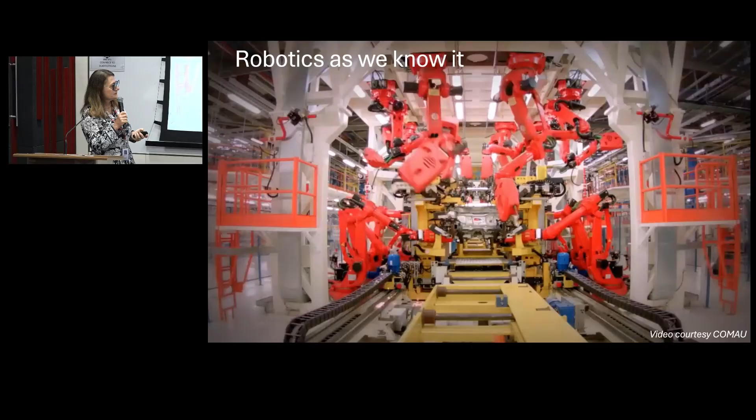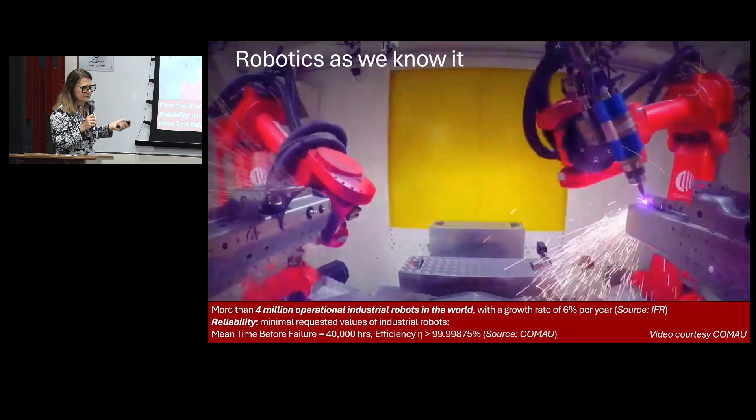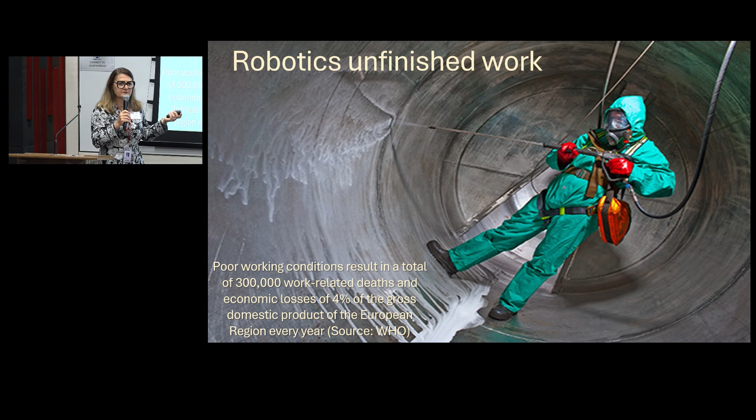This is robotics as we know it, and it's a fantastic kind of technology, so reliable, so effective. There are jobs that cannot be done without robots. Robots can really build most of the objects of our daily life today. But there are still jobs that are done by people and cannot be done by robots yet. And sometimes those jobs are not so good for people because they're dangerous or just because they are not meaningful.

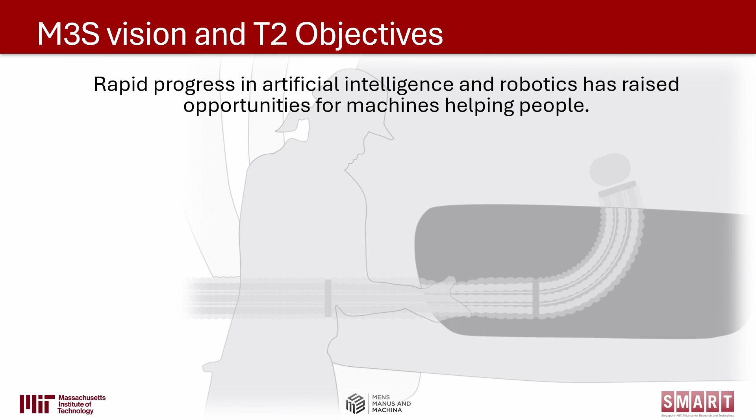So you know that M3S starts from the consideration that we now have a very rapid progress of robotics technologies, of AI, and we can take advantage of that to help people at work. So more specifically, you have heard already that M3S has these two big research questions on how we can take advantage of that and how we should change the way we work and the policies and the institutions.

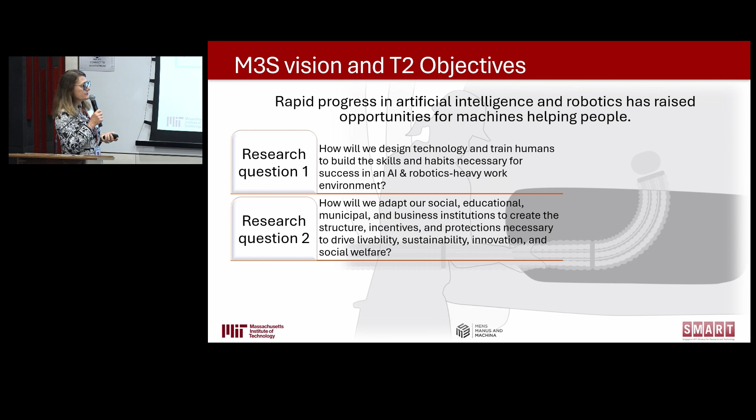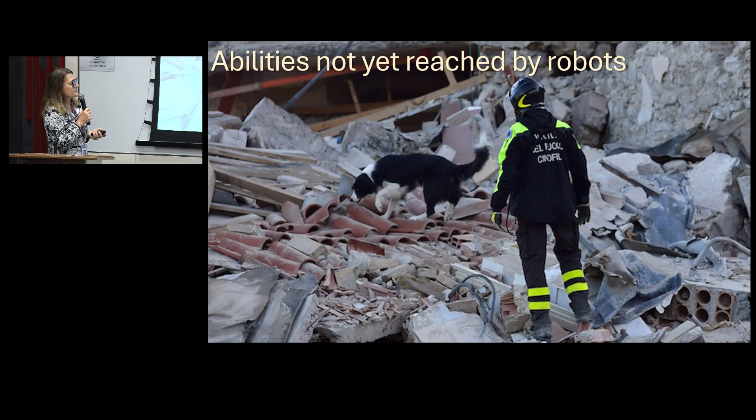More specifically, in M3S, T2 investigates how robots can assist human workers and investigates forms of human-robot interaction at work with cognitive and physical tasks. So the reason why there are jobs still done by human beings is that there are abilities that are not yet reached by robots. So in scenarios like this one, are current existing available robots suited for the tasks? Maybe not yet.

What are the gaps? What we observe in living beings are complex systems operating in very complex environments, which is a bit different from what happens in robotics, because in robotics we think that a complex system is more difficult to control and more likely not to work. So we try to simplify as much as possible. And in the same way, we try to simplify the environment. The factory environments we saw at the beginning, where robots work so well, are sort of simplified and adapted to the robots. But instead, in nature, we see the opposite.

Very complex systems. Those living beings are way more complex than any robot in terms of sensors and muscles to control. And the environments are also complex, real-world environments, but their behavior is so smooth, so effective. So this is exactly what we should do in robotics. We should build robots as complex as needed for the tasks they are supposed to do, and they should be able to operate in real-world environments.

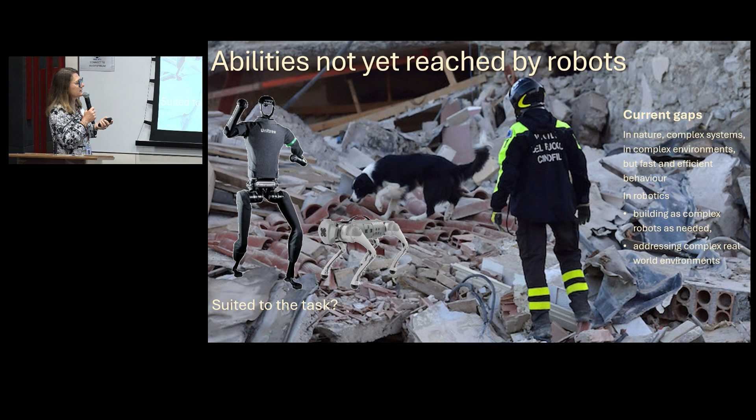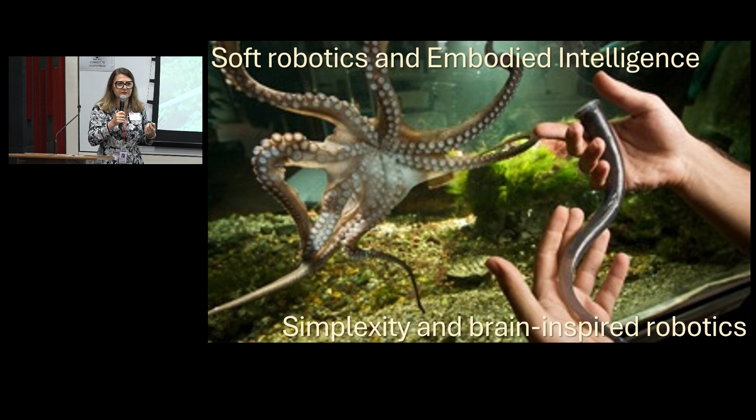We can take lessons from nature. We can try to find the tricks that nature put in place to simplify the control, not the system, not the environment, but the way it works. And this is the direction we are taking in T2. So we are working at two levels. One is the level, let's say, of the body. We are exploring soft robotics technologies for building our robots, because they give us the possibility to implement embodied intelligence, so to distribute intelligence in the body itself and simplify control to some extent, and also take inspiration from

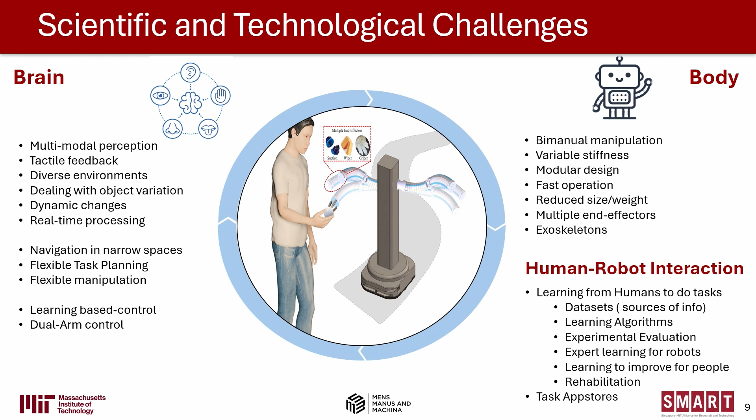some brain mechanisms. So basically in T2 we are addressing some research problems that are more related to the brain of the robots. They include all the perception capabilities, but also the way they control their behavior, navigate in narrow spaces and real-world environments, and the way they can learn. They can learn how to accomplish tasks. They can learn from human beings.

And we also address challenges in the way we design the body of the robot, the kind of technologies that we use. And at some point we'll merge the two, especially for exploring new forms of human-robot interaction, which is very much based on learning from the human workers and the way tasks are accomplished. So this is a quite general concept that we have at the moment for our robot that can be used as a support for human workers.

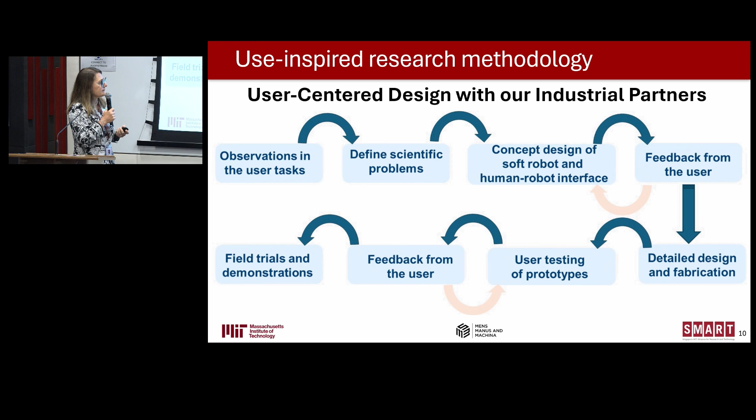We have actually instantiated this concept on very specific use cases. We have collaborated with industrial partners in this. We started with the description of those use cases and the observation of the work environments and the tasks. And then we refined our general concept that you saw to instantiate it on the use cases. We already had some feedback from our industrial partners, and we are now entering the phase of a more detailed design and then the fabrication and testing of the robots.

So the potential applications are many. As I said, it's a quite general concept that we can not only implement in the use cases that we are addressing, but we can extend to other possible applications in real-world scenarios. So it's not only the manufacturing industry, which is, however, one of the possible settings, but also other tasks like service tasks or assistive tasks.

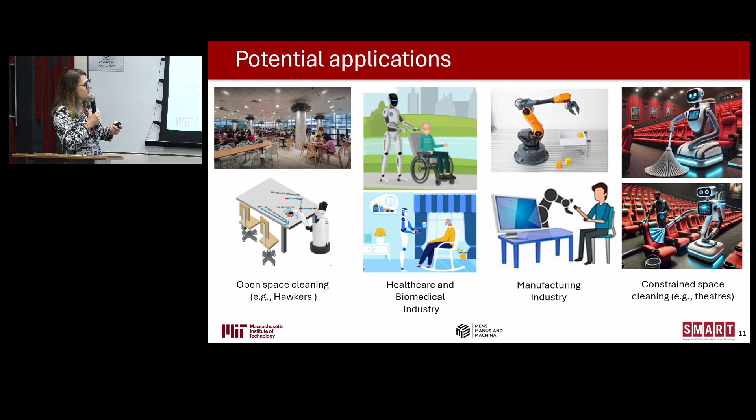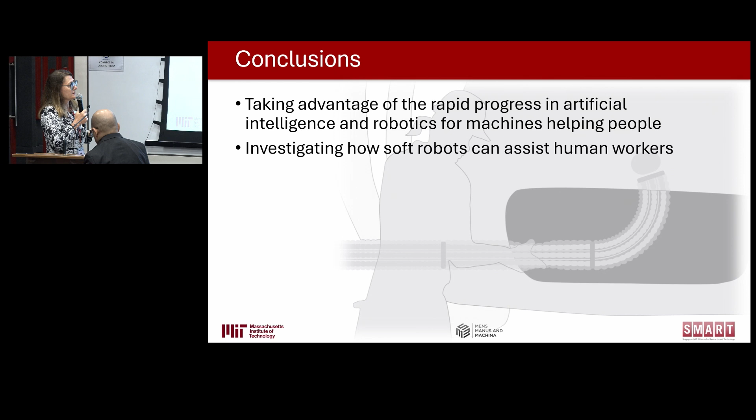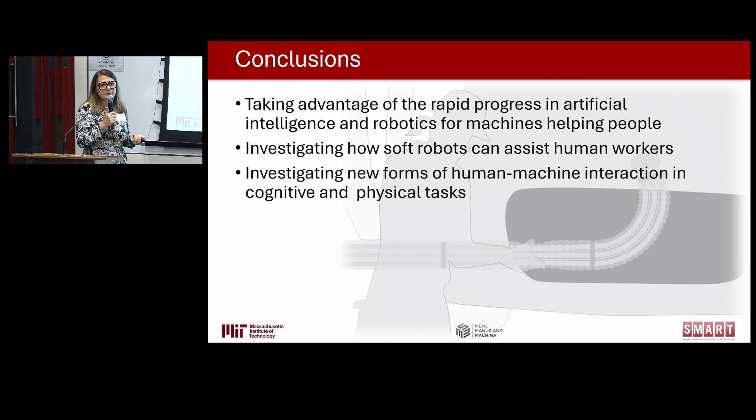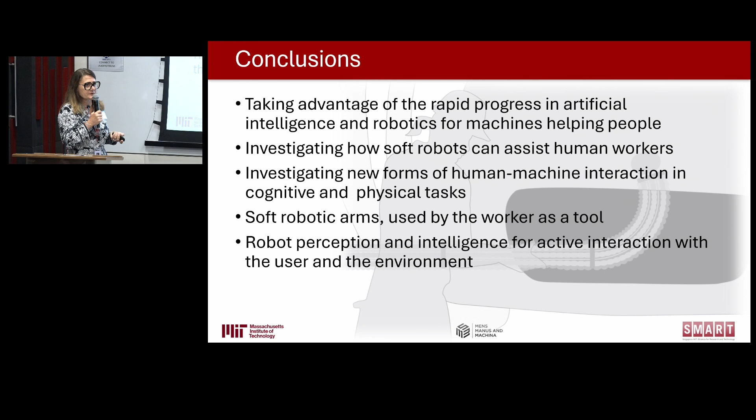So that's quite all. As I said, we want to take advantage of the rapid progress of artificial intelligence and robotics for having robots that help people at work. And specifically, we are investigating how soft robots can assist human workers. We think we can investigate new forms of human-robot interaction that are also based on physical interactions with soft robotic arms that can be used by workers as a tool, and provide them with adequate perception and intelligence for understanding and interacting with humans.